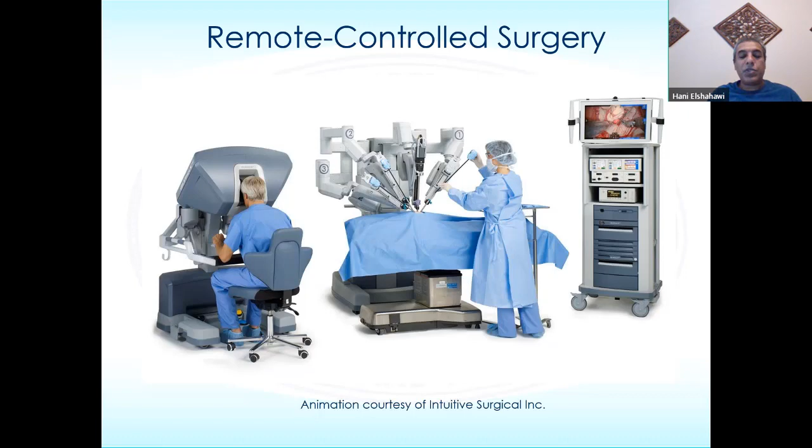Remote control surgery also became a reality roughly around the same time that I published the original work on this, which is 10 years ago. Right now, the equipment you see here is commercial. It's very expensive, so a lot of companies have been working on downsizing it and streamlining it, making it more affordable. But it's a thing—you can actually operate today on open heart surgery halfway across the world. That is actually doable using such equipment.

So real-time monitoring and control is a central tenet of this concept, and we can apply it—and have been applying it—in the oil industry as well, particularly in formation testing and sampling. Conceptually, it's very simple.

It's about connecting the well site and its operations to the various parties, parallelizing the work and collaborating around real time. The requirements for that are quite simple: secure web link, minimal delay, but importantly, bidirectional capability, because it needs to be both the monitoring of the data and sending of the commands or controls to direct the operation.

The benefits are plentiful. They include travel logistics savings, especially in the current environment—that's very obvious—HSE and personnel security, once again, collaboration and knowledge transfer. That's a big deal, because in a lot of our workflows we have silos created by disciplinary boundaries, geographic boundaries, or what have you. Parallelizing the work through real-time collaboration diffuses and dilutes those boundaries.

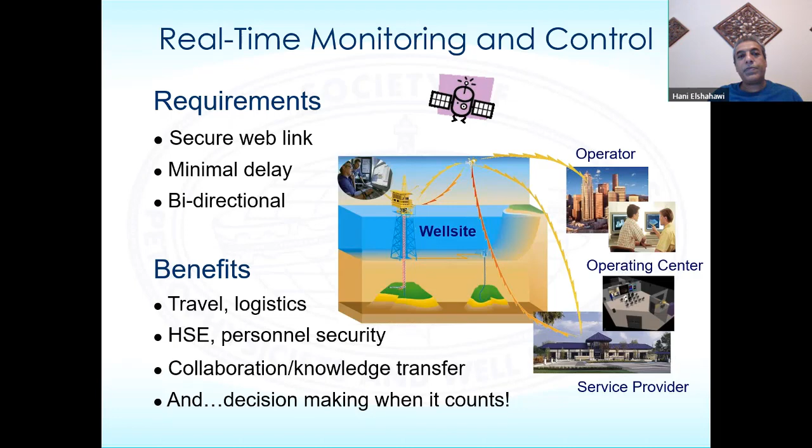By the way, this is a big tenet of digitalization. You hear a lot about digital transformation. The core of digital transformation, in fact, is the removal of silos. The other core part is making decisions when it counts, meaning you take the data but transition that not just to insights, but actually to decisions, actions. Those actions also now change the outcome of your business process. So we've used that a lot in formation testing.

Some applications of formation testing, very briefly, include pressures. Once you gather formation pressures, you can plot gradients and establish fluid contacts based on those. There's also sampling of reservoir fluid, and downhole fluid analysis, used both as a complement to fluid sampling and as an answer product in itself, allowing you to look for intricate changes within fluid composition, laterally or vertically through a well. You can also get permeability related data, translated into deliverability, as well as conduct in situ stress testing using formation testers.

Now let's focus on gradient analysis, which is really the core topic of my talk. The classic way of doing gradient analysis relies on Pascal's law, which implies that if you move away from transition zones, your contact area, the continuous fluid phase pressure profile, the dominant phase pressure, whether oil, gas or brine, is given by this formula: dP by dZ, mostly driven by gravitational forces, equals the density times the gravitational constant, the acceleration of gravity.

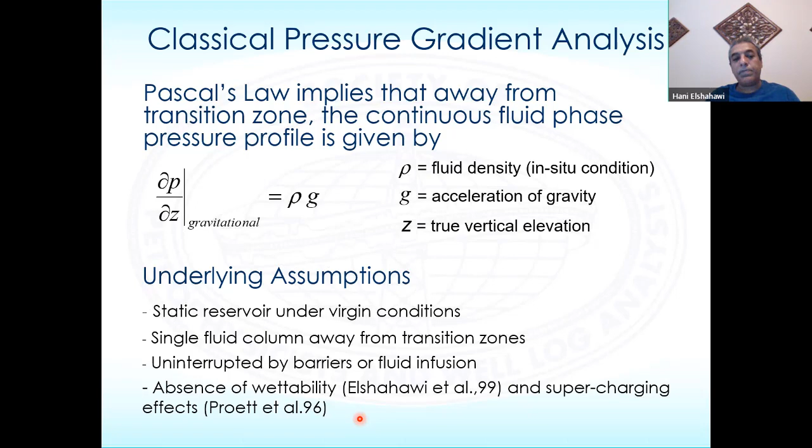So these are all assumptions. But given those assumptions and caveats, if you take the data and plot it as shown here, you have n number of points, the corresponding pressure data and depth pairs for each point. You can draw a line using the classic linear formula y equals mx plus b, and in this case translate that into the equivalence of pressure and subsea vertical depth. You need vertical depth here, or relative depth.

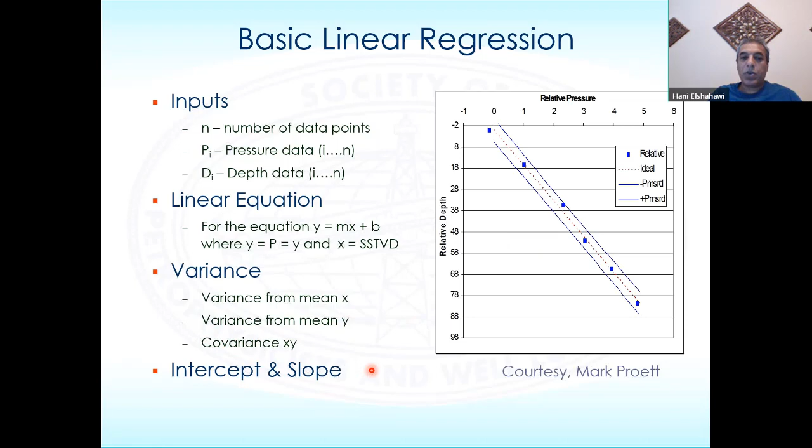You can compute variance from the mean y, and covariance of xy, or either one of these, and then of course compute the intercept and slope. Other things you can calculate using basic linear regression are your correlation coefficient, standard deviation of the slope, the standard error for your y estimate, which will be your depth or pressure, and the standard deviation of your y and x predictions. So this is basic statistical analysis.

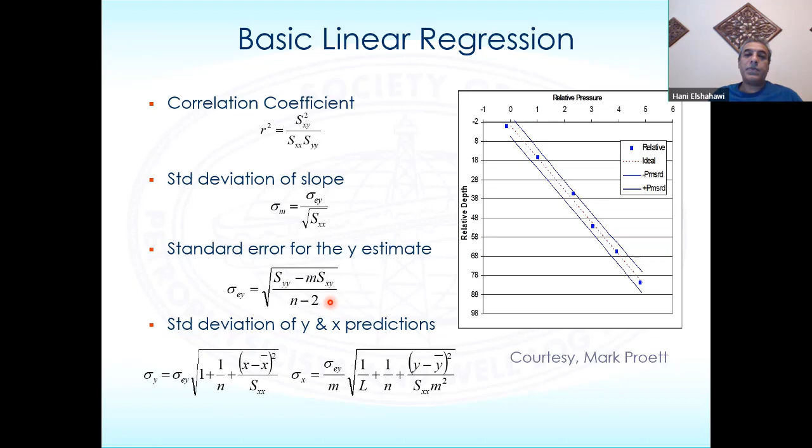Now, this is some real data collected from a number of gauges. Notice the gauges are separated slightly, some of them, due to slightly different accuracy on those gauges. It's not separated for display purposes, but rather because some of them are strain gauges, and some are high resolution and accuracy quartz gauges. You see some of them cluster on top of each other, so you can get really, really good results by doing that.

This is a particularly homogeneous, permeable sand reservoir. You can see that from the NMR permeability curves, and from the density neutron. You can see how the mobilities plot on the higher end, tending toward a couple hundred millidarcy.

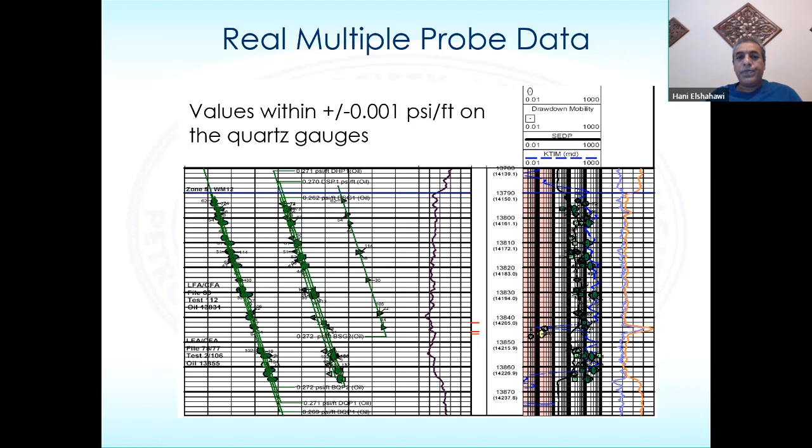And when you plot those, you get really, really good lines. If you look at the slope of some of those lines: 0.271 psi per foot. Another one, a completely different set of data, is 0.27, 0.272. This is amazing, right? So what's the problem here? Is that it?

Is it all about gathering a whole bunch of data, plotting it, and getting your statistics right? No, it's more complex than that, because if you presume a linear dependency of P on Z, P being pressure and Z being depth, it means you're already predisposed or biased toward interpreting intervals as being connected. So you've already presupposed that, and subtle changes may be obscured by standard regression analysis. So what if you have something in between? Going back to my previous example, there was a little carbonate stringer in there. What happens with that? Is it a barrier to flow? Do I lump the points on either side of that, or construct it separately?

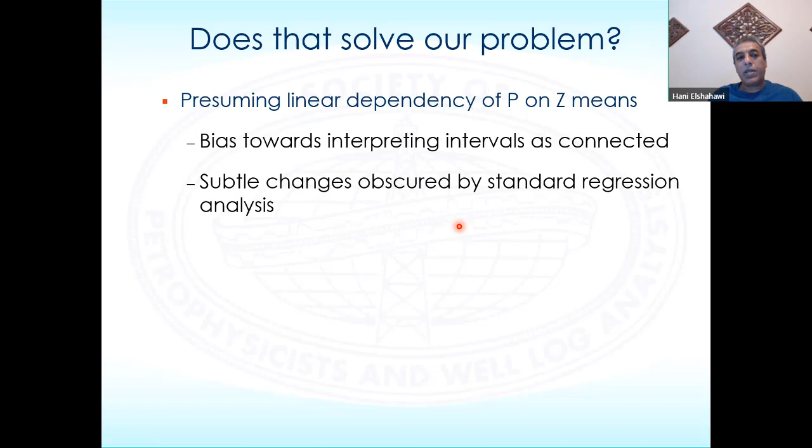We'll see some of those as they come up in the examples. More importantly, there's other things we have learned over the years now.

We now understand, for example, that all hydrocarbon columns are graded by definition, meaning that just like an orange juice or some other heavy juice, mango juice or something else, would settle if you left it for a while in your glass cup due to the gravity. The same thing happens actually to hydrocarbons, because hydrocarbons are complex mixtures. They're not actually a singular fluid. And so they're affected too by gravity, which means they separate and segregate by the gravity. So all hydrocarbons actually are graded to some extent by definition, some more than others, which means that by definition, you don't actually have a line that can define the density, because the density is actually varying through it.

So we know that. So how come actually then we're constructing lines? It's almost a paradox here.

And then we know also that reservoir compartmentalization is quite prevalent. It's not rare. I wouldn't say it's the rule rather than the exception, but it is quite common. And that pressure is a necessary but insufficient condition to establish connectivity. In other words, if you have pressure continuity, that will be a requirement for you to know that you have a connected column up and down. But just having it doesn't prove that it is connected. You need other things.

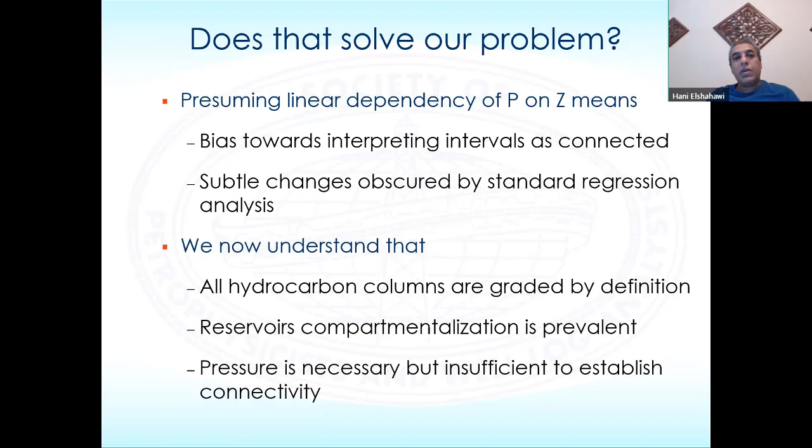Just to show you that reservoir compartmentalization is quite common, in this study by DeepStar about 10 years ago, they looked at 28 Deepwater Gulf of Mexico fields. And they plotted kind of where do they perform relative to what had been pre-diagnosed. 75% of these reservoirs underperformed, both on rate and recovery. And the number one cause of that has been compartmentalization. So it's really quite prevalent.

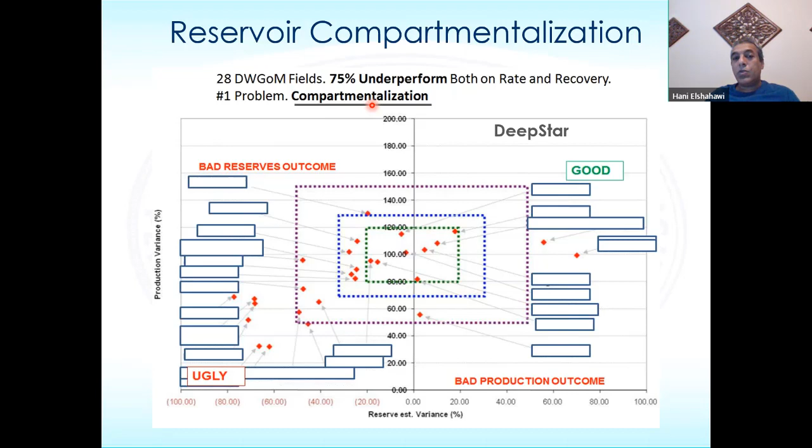So now that we know that, what does that mean with respect to our approach to the data? Should we treat it any differently, or should it just be a statistical exercise?

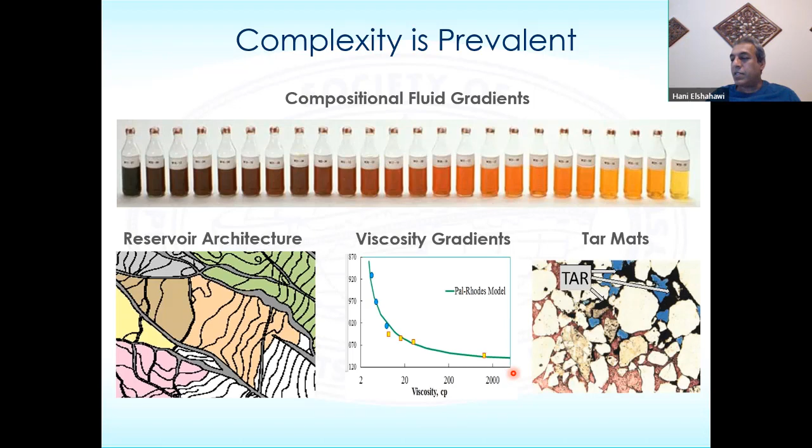To get at the root of the answer for this, I think we need to examine kind of conceptual frameworks by which we think, particularly in the Western world. To some extent, these have parallels also in the Eastern philosophy. But there are two dominant conceptual frameworks that have shaped the scientific methodology over the years. One is deductive thinking, and it manifests itself in how you would use statistical means, for example. And this was first taught by Aristotle.

He taught basically that the whole is equal to the sum of the parts, and that reality is discerned only by the sensible, by what the eye can see, the hand could touch, and such. And it uses past information to predict the future state. So this is a paradigm. And it's pretty much at the heart of what we do with things like statistical analyses, because it treats the data as the truth and the only truth.

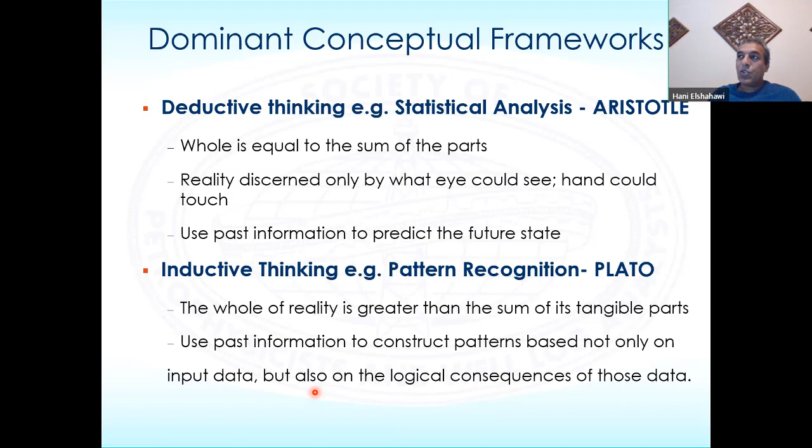On the other hand, Plato, who's Aristotle's teacher, of course, his teachings were at the root of the inductive thinking method. And that's, we use that quite a bit in petrophysics with pattern recognition, for example. Now, he taught that the whole of reality is greater than the sum of its tangible parts, and that one must use past information to construct patterns that are not only based on the input data, but also on the logical consequences of those data. So think about that a little bit, and the parallels between that and what we talked about with respect to compartmentalization and grading. Those are things we know exist, yet we may not see them in the samples of data that we collect. So how can we invoke that in our analysis?

Now, I offer here, which I have essentially been using in much of my work, whether it's related to digital, whether you're related to formation testing or otherwise, an alternative which is called abduction reasoning, which is really a better way.

And you can apply this, by the way, to business thesis, to exploration thesis, to data analysis and analytics, whatever. But abduction reasoning is kind of this different creative process in which you pose a generalization, and it's precipitated initially as an explanation of your observed facts.

So that means you plot, for example, the linear trend to your data. However, you continue to interrogate, refine, and revise as you collect more data. So you take that explanation and put it to the test against evidence that can then refute or confirm it. And then that hypothesis will either persist or has to be changed.

Now, the stability of your interpretation is reached upon what's called saturation, which is when collecting new data or analyzing different aspects of the evidence do not lead to any substantial or further insights. So you start essentially with abduction, you formulate the hypothesis, you go to deduction, and you look at the logical consequences of that.

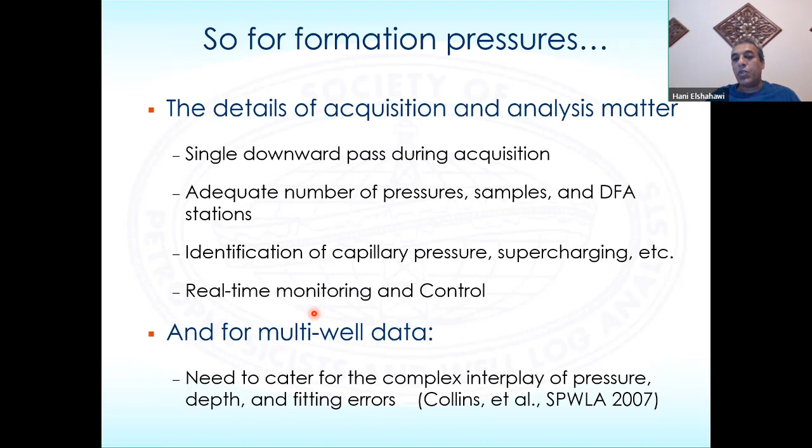For multi-well data, there's other nuances that one has to factor in, which is the need to cater for the complex interplay between pressure, depth, and fitting errors, because there's a lot of errors that compound here. And then you need to draw these ellipses of uncertainty and see what they mean. So I refer you to this really seminal work by Collins et al. in 2007 for more on that.

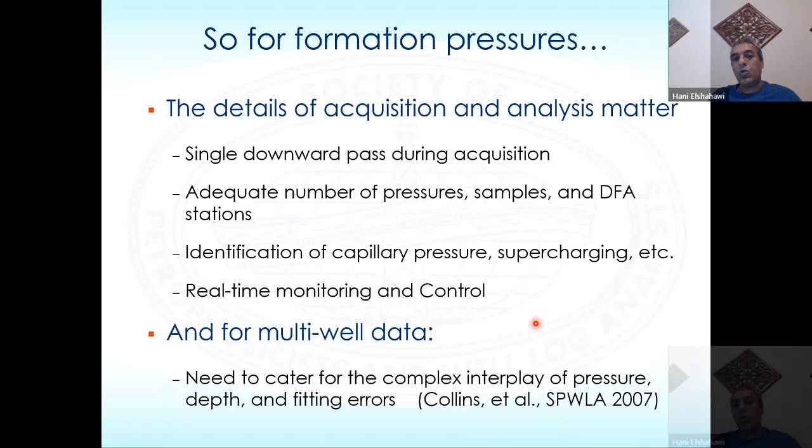I'm going to focus here in my examples on single well. Here's a gradient interpretation methodology for a single well.

So you start by quality control, discriminating the poor data from physical trends. And then as you're doing that, you ensure that you're collecting sufficient pressure samples and downhole fluid analysis data. We'll come to the significance of sample and downhole fluid analysis data a little bit later in the examples. But they are important because they're corroborating independent evidence.

Because as I mentioned before, pressure is a necessary but insufficient condition to establish things like connectivity. You can establish the lack of connectivity, but not the connectivity. So you can prove basically the guiltiness, but not the innocence. And then you pick zones using petrophysics, geology, and what's called excess pressure, which I'm going to show in a little bit here.

And so this is how you bring the contextual information into the picture. I'm a big advocate, for example, of conducting analyses using pressure data with the logs alongside of it. Obviously, being a petrophysicist, I have a bias for that, but that's the context that is absolutely necessary.

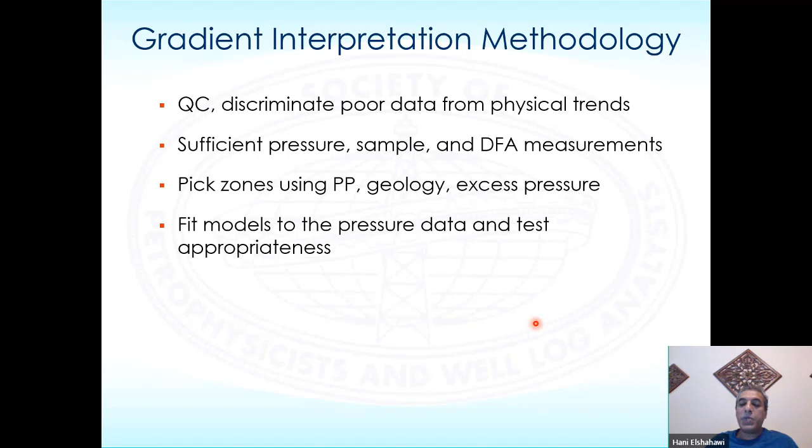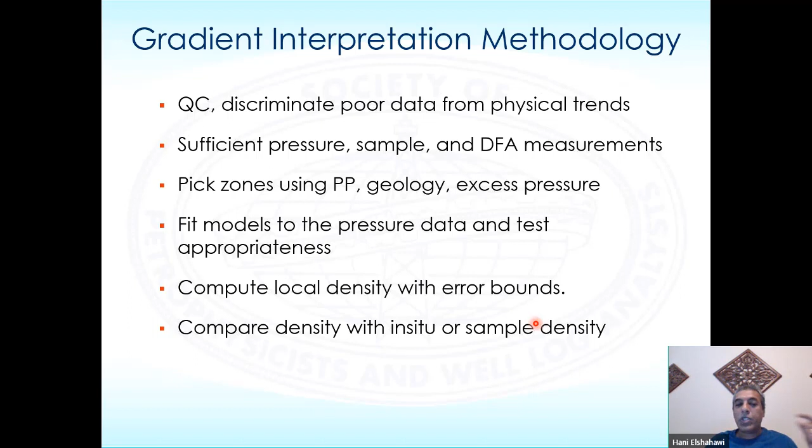You fit the models to the pressure data and test appropriateness, then compute local density with error bounds, compare those to other corroborating data like in situ or sample density, and iterate. You compute the positions and uncertainty of the contacts, and go back and revisit your hypothesis if it doesn't work.

A simple tool that everyone can use here, highly valuable and easy to do, is the idea of residual excess pressure analysis. It's really nothing more than a transformation of the data so that you can augment and zoom in on the trends, because the trends matter as much as the overall fit.

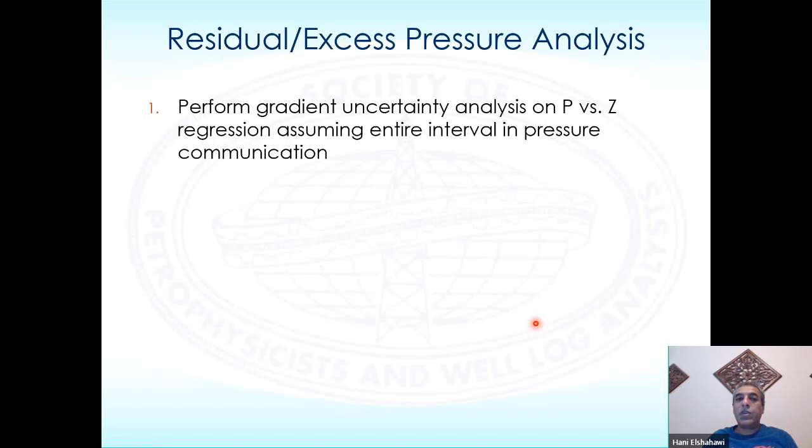First, you start by performing gradient uncertainty analysis on P versus Z regression, assuming that everything is connected. You make that assumption knowing that it's wrong. Then you use the regression equation to calculate the pressure gradient for each data point, and subtract the two. You calculate the residual pressure by subtracting the fitted gradient from the measured, and that produces your residual.

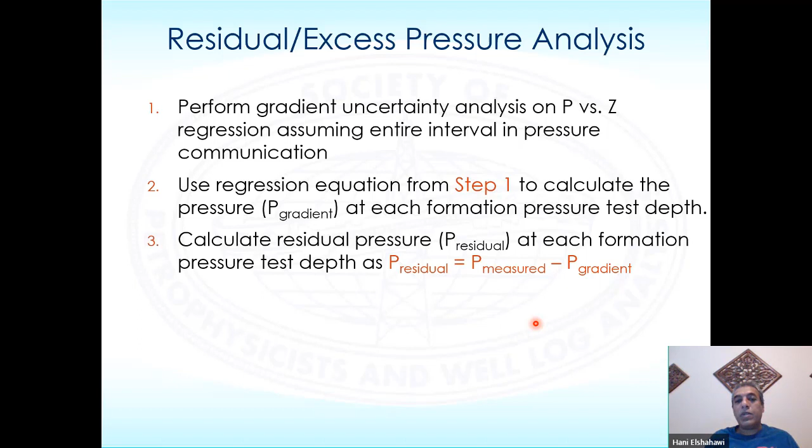Then you plot that residual versus depth in the same way you would plot the actual pressure data, and what that does is accentuate the trends. You can do that for every sub-interval you've identified. So now if you see breaks, you go back and say, I need to break down these intervals into smaller ones. I cannot really be lumping them.

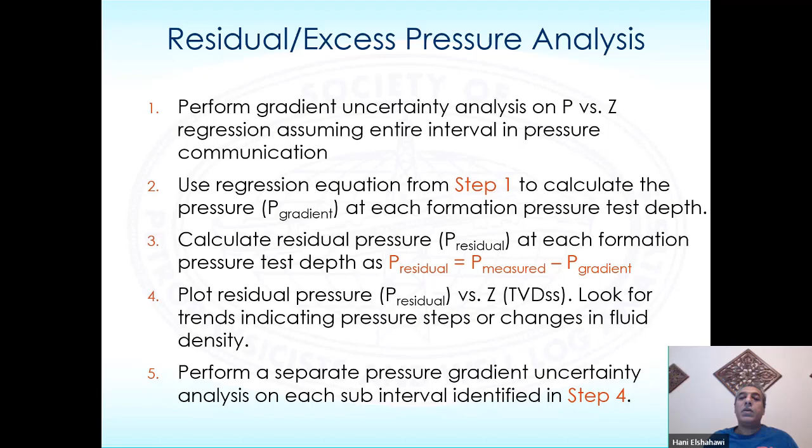Here's a synthetic example, just used to illustrate. Look at these two sands. We fix the depth here and we vary the pressures. Each one will have 5 tests separated 5 feet apart for simplicity. I'm going to show you very quickly 5 models.

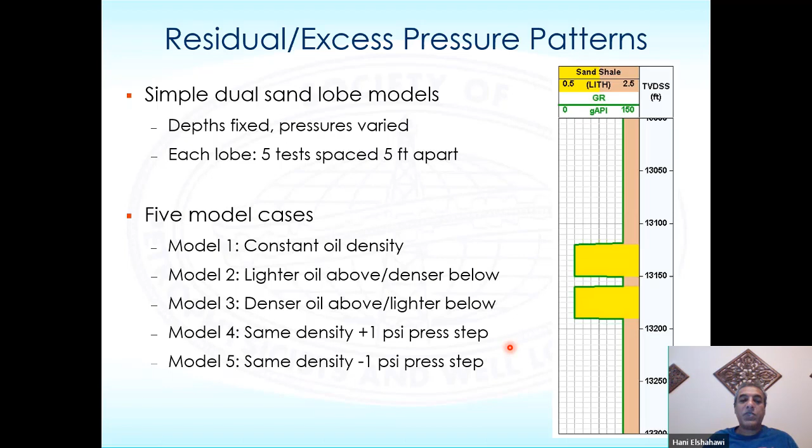Model 1 is a constant oil density, what it would look like. Model 2 will have lighter oil density and denser below, which is what you would generally expect if you have some kind of grading, and these two are connected. Model 3 has denser oil above and lighter below, which would tell you right away that they're not vertically connected, because if they were, it's really not possible to have the denser fluid sitting above the lighter one. Then model 4, the same density, but you have an offset of a PSI, and vice versa for model 5.

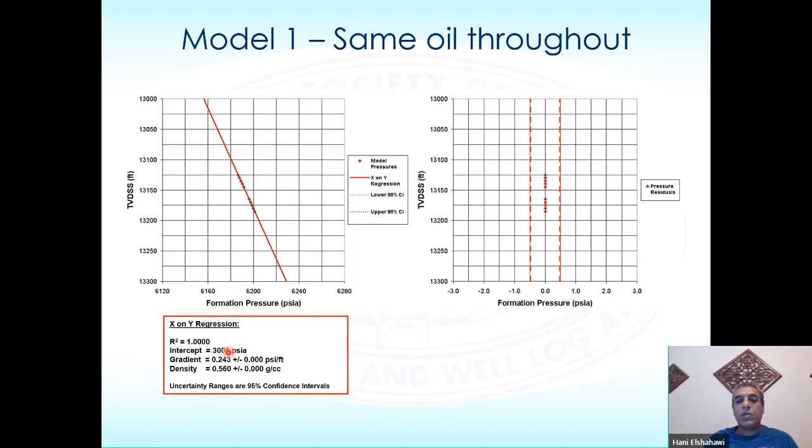So this is what the residual plot will look like if you had the same oil throughout. If you look at the statistics here, you have an R squared of 1, and obviously a very tight uncertainty bound. Now, if I had lighter on top, it fits very well on a line.

It'll have an R squared of 0.9999, but that's exactly the problem. It obscures the actual complexity in the column, because in reality the top fluid is lighter than the one below. So if you plot the residuals, this is what you get: something sloping this way, followed by that one sloping the other way. That tells you that you need to go back and actually subdivide those two, because they're not lying on the same trend. You wouldn't be able to tell that if you just plotted it like on the left here.

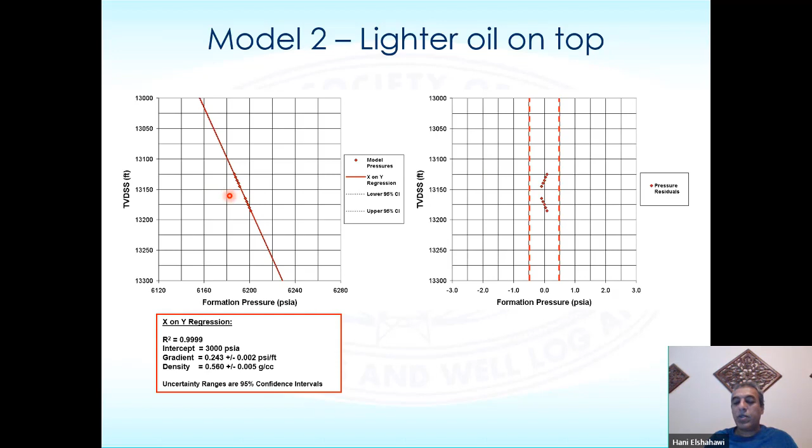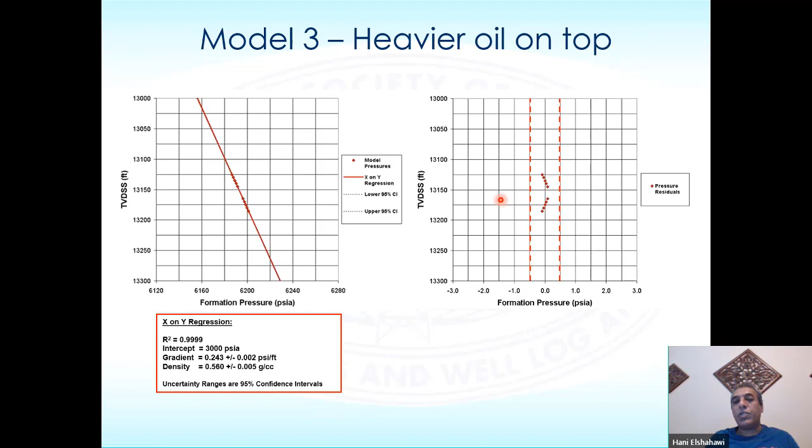This is the same thing, but now heavier on top, which again gives 0.9999. So it looks no different than the previous result. You'd be happy with it, but actually it's obscuring a very important finding, which is that you probably have a boundary between those two. That shale barrier I showed earlier is actually probably a laterally contiguous shale or regional seal.

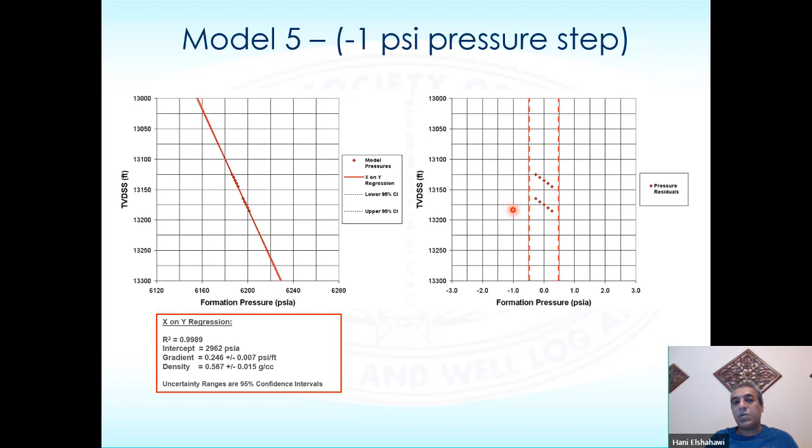Here's what happens if you have a 1 psi pressure step, and if you have another psi to the minus side pressure step. So this is how we would do it with real data.

You would plot it like that, and you would look for the outliers. By the way, you can read more about the two lines here in this SPWLA paper.

The two lines here: one is actually honoring the actual data, and the other one is modeled based on your expectation of pressure repeatability and depth uncertainty. In reality, these two should converge. So the fact that you have two outliers here tells you that these two were probably collected out of sequence or something else. But that detail will all be there in the raw data, which is why raw data is really important when you're analyzing pressures.

It's a little bit like sushi, I always say. The more raw, the better. The more cooked, the less tasty or less palatable it is.

So you exclude these, and then you perform your regression again, and now you can see a better convergence of your expected and modeled envelopes.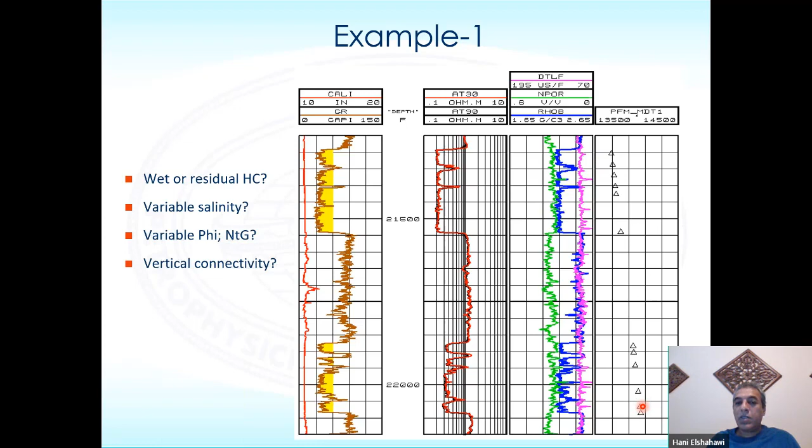So should I be fitting a straight line to these just because I can? Here's the exercise of doing that. If you fit a line to it, it gives you 0.995, I think, correlation coefficient. So it's pretty darn good.

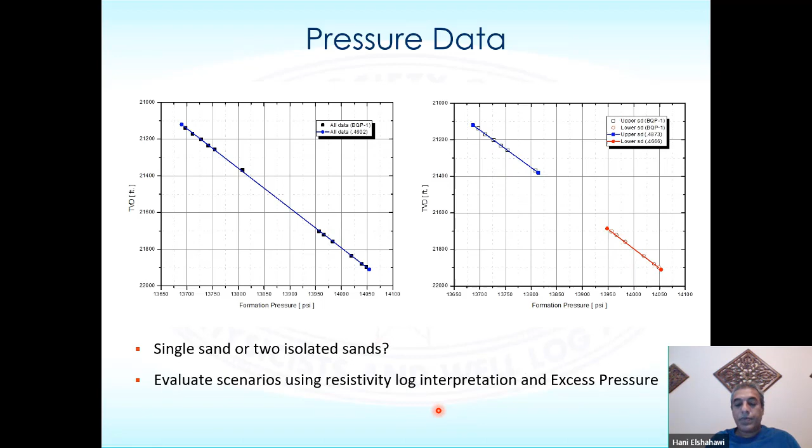But again, in light of what we talked about, should I be doing that or should I be doing this? That's really the question. Well, here's what you would do. If you put the confidence interval, you'll find that actually the bottom one lies within your confidence interval, which means statistically speaking, you cannot say that these two aren't connected. The 95% confidence limit includes this.

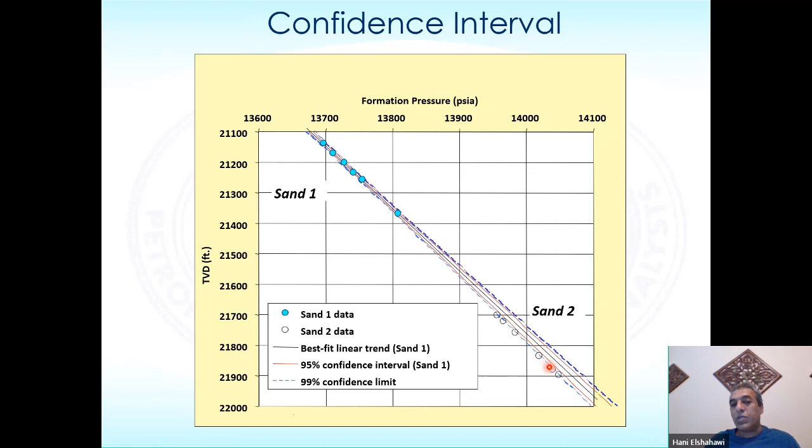But when you use your excess pressure analysis, now it tells you a different story. Why is that? Because now your excess pressure tells you that those densities just are not the same - the slope is not the same. And that is similar to model 5, which I showed earlier.

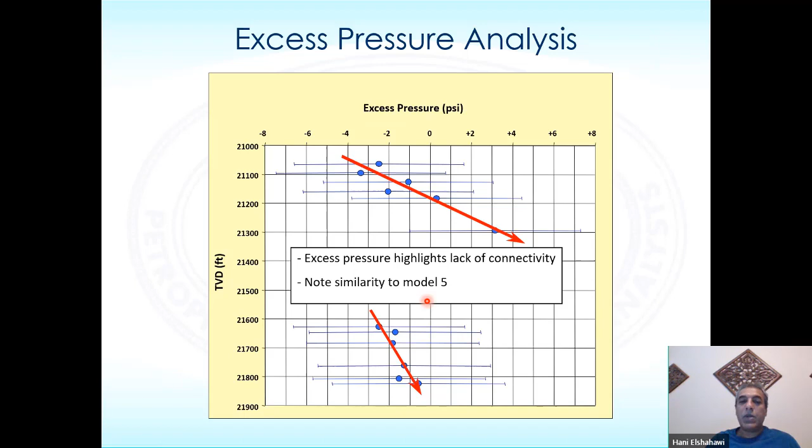All right, now what actually happens here - because we did take a sample, and that's the benefit of actually being able to sample - the reality is the salinity of this water sand up here is significantly different than the one below. It's about 180,000 ppm, and the one below is about 130,000 ppm.

And you can reconcile that by looking at the different resistivity calculations. You can back calculate your resistivity if you had 130, or 180, or 100, and you can see where it matches up here. So the high net-to-gross sand intervals are really comparable - both of them are high net to gross, so that's not the issue. The issue is they have different salinities, which is why you have a different resistivity baseline.

But you could deduce that from your pressures, only if you use the insights of your residual pressure plot, as well as accept that it's a prevalent thing that columns like this are not connected, even though they would fall on a line. So just because things fall on a line doesn't mean that they're necessarily interrelated.

By the way, this is a much bigger issue that we can discuss in future webinars. It gets to the heart that it is not just about the data, it is not just about your subsampling of a complex system. If you took a bunch of rock samples, for example, that does not constitute the totality of your reservoir - that only allows you to fill in some inferences about the totality of your overall model. The same thing applies here, so one always has to approach pressures with that in mind.

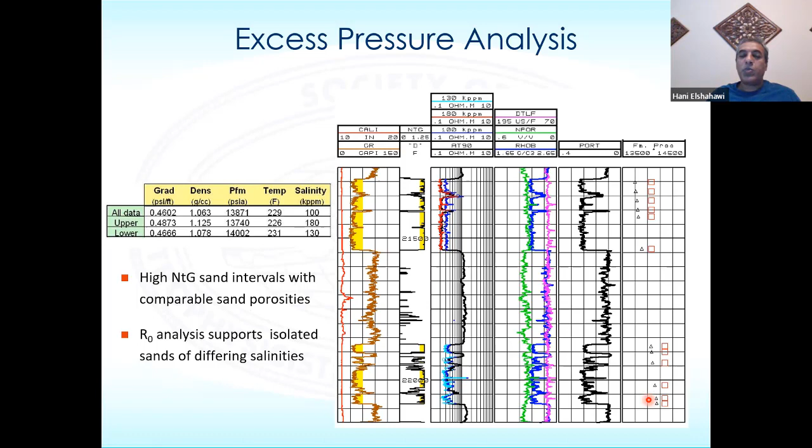What about oils now? Well, it gets even more interesting, okay, because with oils you also get gravity diffusion, which gives you compositional gradients. For example, the Gibbs sedimentation equation, if you simplify, will give you basically grading with the different molecular weight components - and there are hundreds of these components in any given black oil - with depth.

So both molecular diffusion as well as thermal diffusion, as well as other non-equilibrium forces that you may have, like convection, current charge, biodegradation, leaky seals, water washing - all of these can cause even more complexity, not just the gravitational component. That together means that with oils, you really have to be careful about drawing a line.

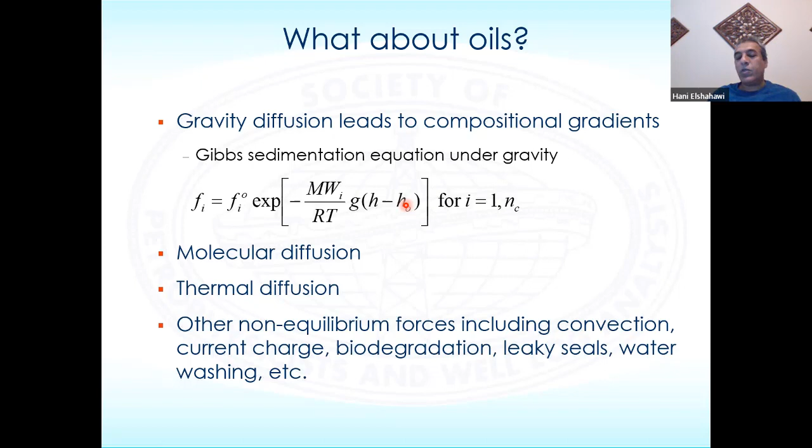And this is our second example, which talks about that. You can read more about it in this SPE reference here. Once again, a bunch of points on an Excel plot without any logs to go with it. Sure, I can draw a line through them - very good correlation coefficient. End of story.

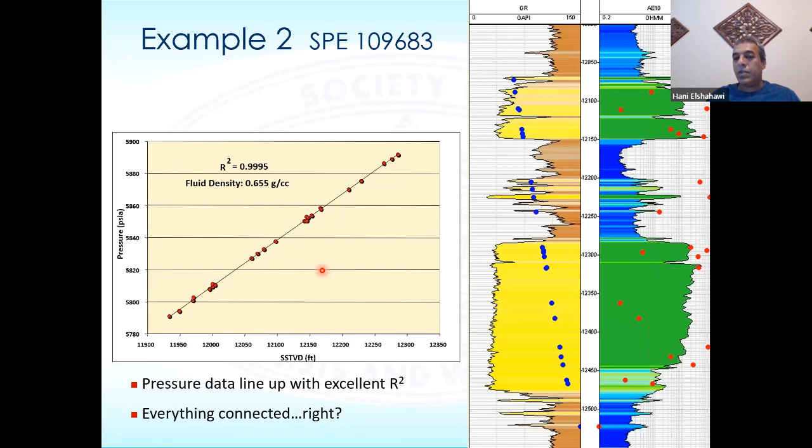So everything is connected, right? Well, if you have retained anything from what I just talked about earlier, maybe not. Why not? Well, look at those pressures - they're gathered in this sand body here, in these stringer sands, and in this massive sand below. Why did I presume that all of these are connected a priori? Should I presume that they're connected a priori?

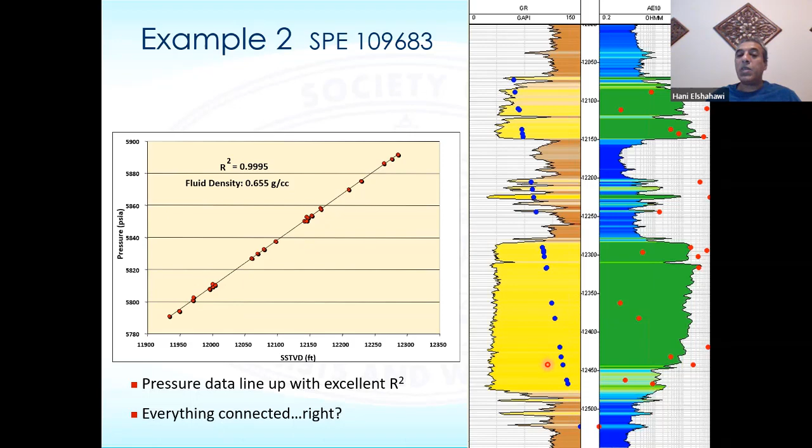Just because I have a whole bunch of data with a little bit of scatter on them doesn't mean that they are connected. And even if they were, that still doesn't mean that this is connected in production space. Now let's look at the detail here.

This is where sampling and other corroborating data really comes in to make a big difference. So I'm going to show you the results of the so-called downhole fluid analysis measurements that were collected in this part of the sand - you see the 5 stations here at the top, in the middle, and at the base of it.

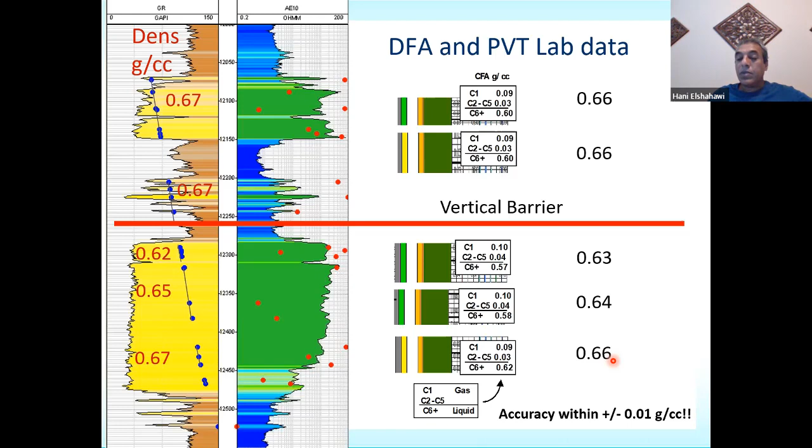Impressively, the accuracy between all these different physical measurements is within 0.01 gram per cc, which, by the way, is as good as you're going to get in any high accuracy lab grade analytical tool for density. 0.01 gram per cc from an accuracy point of view is very impressive. But this is real data.

Now we can integrate other things too. For example, in the workflows I've done quite a bit of work on with my colleagues at Shell, we were integrating advanced mud gas logs. From advanced mud gas logs, you can get the C1, the methane relative concentration, and you can also get your methane isotope analysis, shown here in the red dots. These are point measurements.

If you plot them here, though, and you plot the GOR measured from the fluids or measured using downhole fluid analysis tools, you can actually see the parallels. You see that F and G, the two top stations, are very, very similar. Of course, that's also corroborated by the very similar density. You can see the flat lining in both the methane relative concentration as well as the thermogenic charged content given by the methane isotope analysis.

Then if you go down here, you see this big jump in GOR, and you see the same trend in your methane concentration in the mud gas, and you see again that inversion in your methane isotope analysis. So it all hangs together. As I introduce more data and revisit and test and try to fail my hypotheses, it's holding.

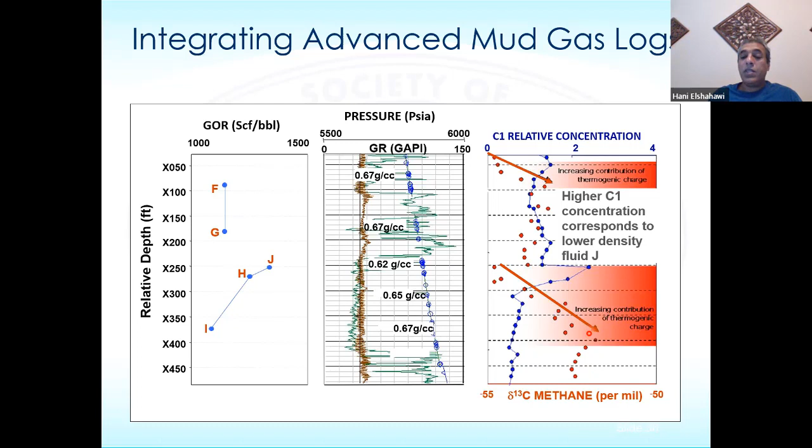In conclusion, hope I convinced you that grading and compartments are prevalent. You can visit some of my other works in the last 10 years, which talk about some of those. Linear gradients are the exception, not the rule, mainly because most of the fluids we look at of interest, particularly hydrocarbons, that is generally not the case. We can approximate by a series of lines, but it's not a line.

So you have to give it careful thought and quality control before statistical analysis. Before, not after, before. And while you're doing it, but not after the fact. Consider pressure, depth, and fitting errors. It's very important to keep the context in mind. The contextual information is as important as the data itself, if not more important.

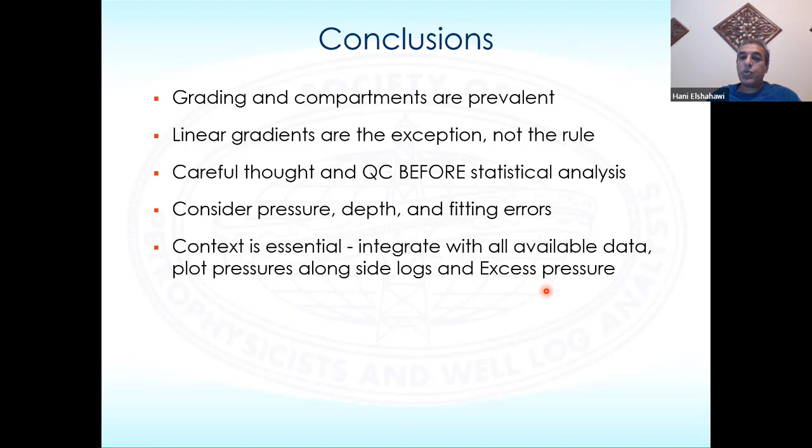So integrate with all the available data. You plot the pressures alongside the logs as a minimum, and use the excess pressure plot to accentuate the trends, because trends are an important proxy for context. Extrapolate only if flow continuity is proven beyond doubt by independent corroborating data. So you don't draw the line across just because you can, but because there is evidence to suggest that you might or should.

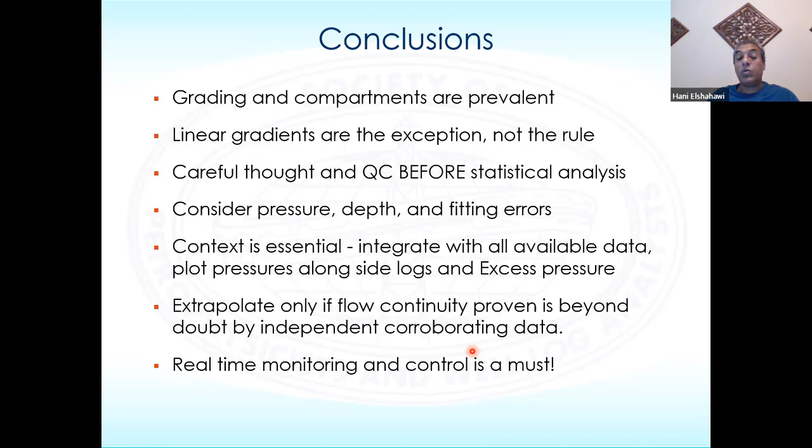And lastly, I leave you with the thought that real-time monitoring and control is not really a luxury, especially not in today's environment, but it's a must. Hopefully in the future we can talk a bit more about real-time monitoring and control, because I think it's very topical. So I'll leave you with this slide, maybe as a bit of a teaser for the next webinar.

So real-time monitoring and control, formation testing applications, and really beyond that is about intervention, it's about decision-making, and very importantly, it's about integration and collaboration. And the beauty is you can do that anywhere, anytime. That is not any more relevant than in today's environment. So thank you very much for your attention, and look forward to engaging with you in future webinars.